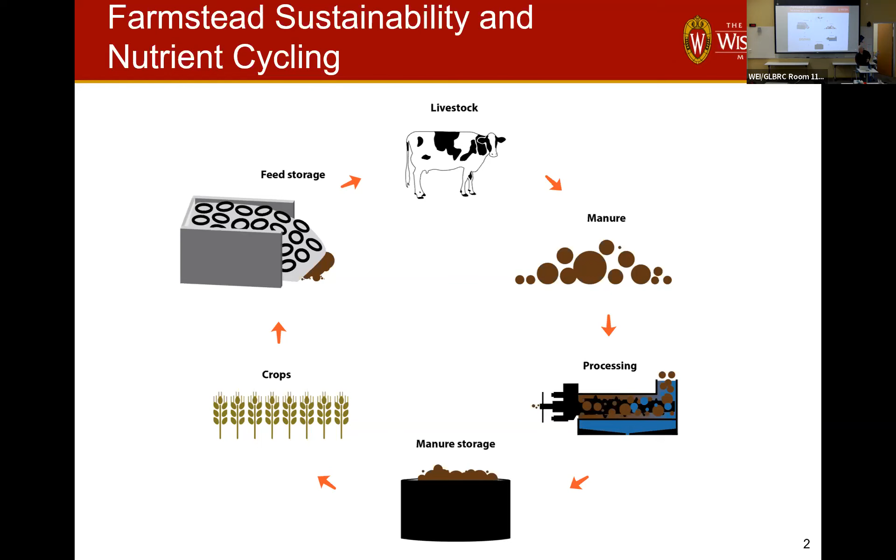Again, livestock systems in particular are going to be a bit of a focus, though I guess I don't have to do that for this energy course. I typically talk to people about digesters in Wisconsin, focused on ag systems. So if you want to talk about the other ones, I'm happy to. But in general, I think of it as a processing system.

I call it processing because, in my engineering training, we would say treatment is trying to end up with some specific outcome. In a treatment system, you're trying to attain an output that meets a certain characteristic. So if I'm going from manure to clean water, I'm trying to hit certain goals for the water through the treatment system. With processing, I'm trying to collect something. I'm not necessarily aiming for where the manure is going to end up, but I'm trying to gather something. So it's a processing system that I integrate into the system.

Livestock systems, do a lot of people have an ag background here? No? One? Okay, that's all right. You eat food, you're not too far from it.

But in a livestock system, manure is produced and then it's land applied. It's similar to human waste, except human waste goes through the wastewater treatment system, where they collect sludge, whether they have a digester or settling tanks, and that goes out to the land, and they treat the rest to clean water. So whatever you're capturing, a lot of it ends up in land application. And so the digester is going to treat, or process, some of that.

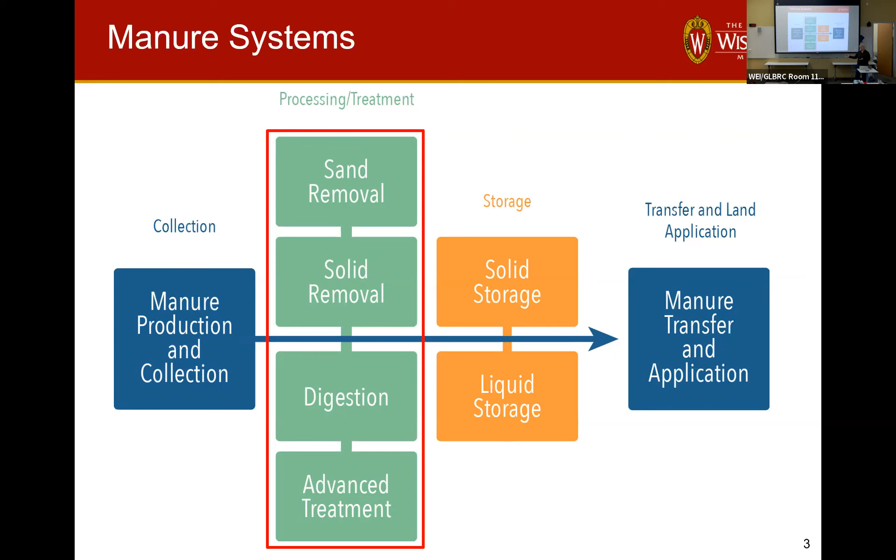The reason I like to highlight the difference is because a lot of people, like a student group that came to me, will say they'll put it in a digester and it'll all be done. But no, you still have manure or waste or whatever you put in. On the opposite side, you've just lost some constituents in the biogas. You still have to handle the product on the other end. It's not magically transformed.

There's a lot of potential for growth in renewable energy capacity. We don't add a whole lot of bioenergy each year. This is globally, and in the US it's even smaller. The percentage of renewable energy in the US, from a different presentation, is something like 12%, depending on your region. And the existing capacity of bioenergy isn't that huge. But there's a lot of potential because it has some flexibilities, and building out a renewable structure with it has benefits compared to some other technologies. So what are our limits to wind and solar?

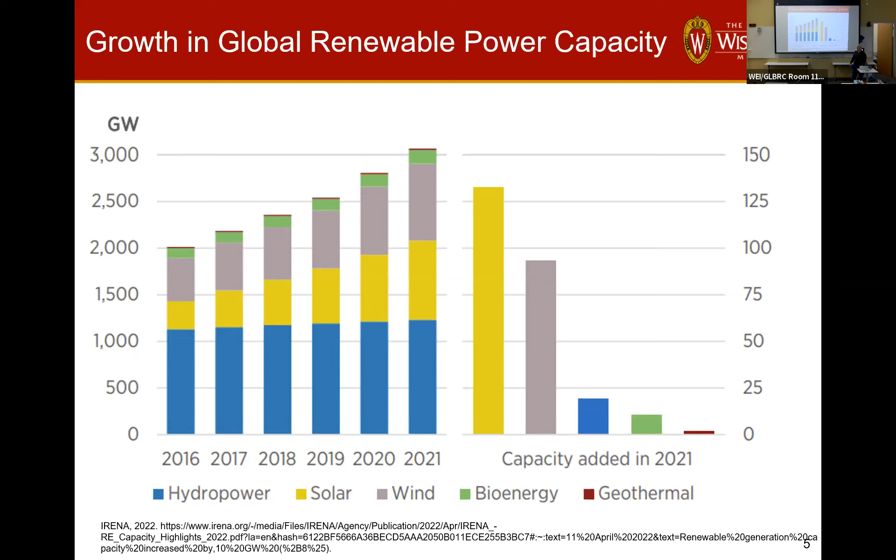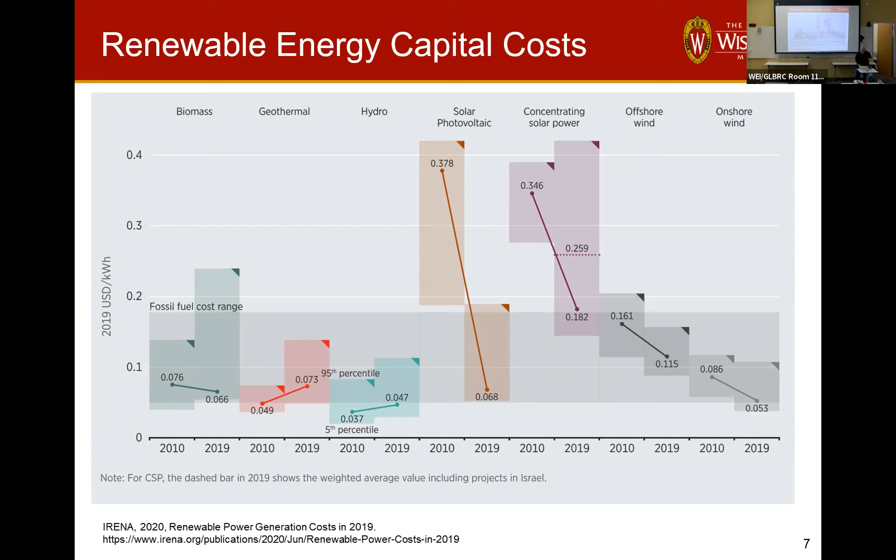And then we see where is biomass. So biomass is over here. It's always not been super high. I would say there's a lot of operational challenges with biomass energy and some other things that make it a little bit difficult. And you can see the range of it is pretty large as well, but not totally outside of the realm of reasonable compared to some typical fossil fuel replacements.

All right, so people get digesters. They're great because you can produce energy, renewable energy, right? You're using a waste product, capturing something else. That seems kind of great. You're making something. People ask me how I got into these kinds of fields. Besides love working with shit, you make something that people think of as terrible into something you can gain a product from. That's kind of a beneficial thing.

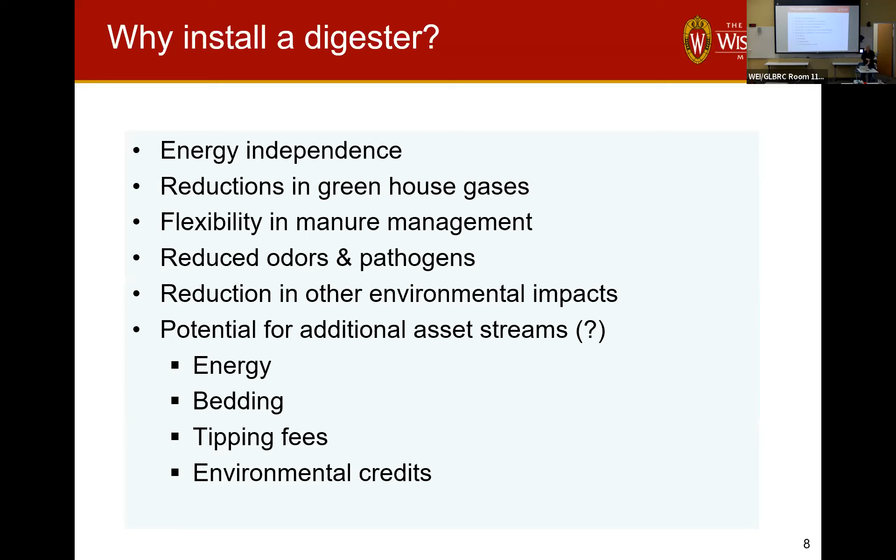It can reduce greenhouse gases. It gives you some flexibility. It reduces odor and pathogens, and it has all of these other benefits that are really great. So what is it, right? So we showed before that picture. So it's a biological process. It breaks down organic matter.

In the areas I work in, they call those feedstocks. I just say that because in different industries, you're looking at different terms for things. I was at a grasslands conference and people got really confused. So the things that go into the digester, I'm going to call feedstocks. You're in anaerobic conditions, so those types of microorganisms can take over, and their byproduct is methane and CO2, right?

So there's some other little things in there. Sometimes people also call this biogas in certain industries. I think in the landfill space, they'll call it biogas more because there's two primary products. I would say typically you're looking at methane in the range of 60 to 65%. Then the rest of that is carbon dioxide. There's some hydrogen sulfide and some other things that cause tons of havoc and are annoying, but they're at really low concentrations compared to what you see here.

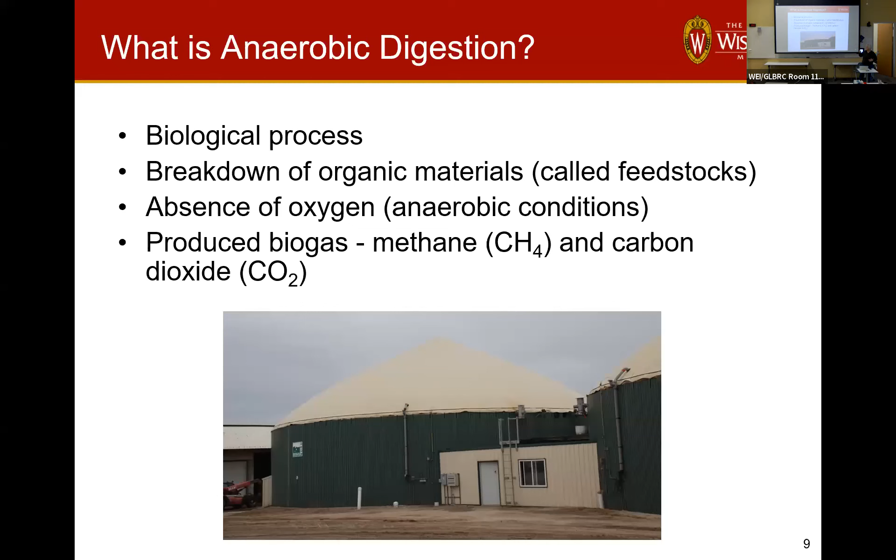In an agricultural setting, you typically aren't going to have a lot of engineers running these in the US. They're operating them, trying to get them to produce biogas just for sale. The other parameters, if you have more pathogen kill, that's great, but I haven't really met a lot of producers who are actively driving at trying to reduce that. So a little bit of a different scheme, even though the process is the same.

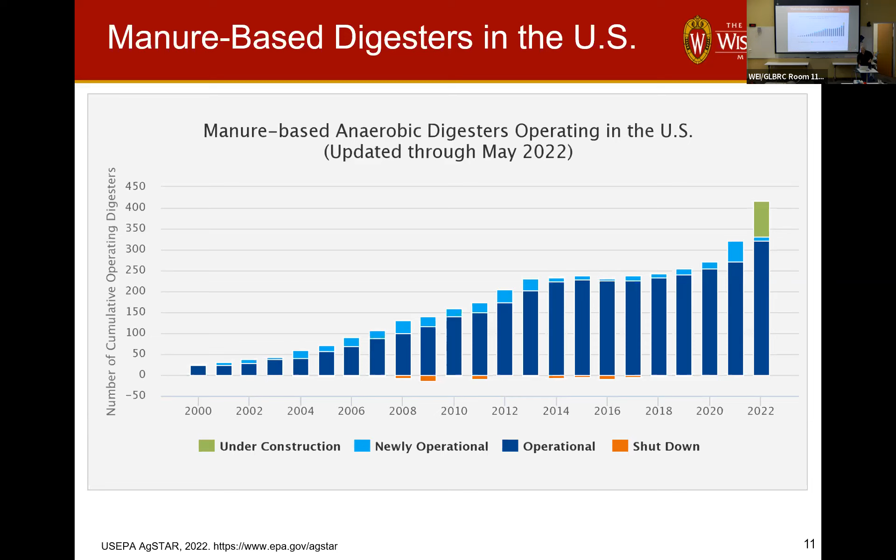So I as an engineer always want to, I'd rather look at some data and build this thing, but policy really is the important part that recognizes how we see change really push through. So if you're interested in policy, make that happen for us.

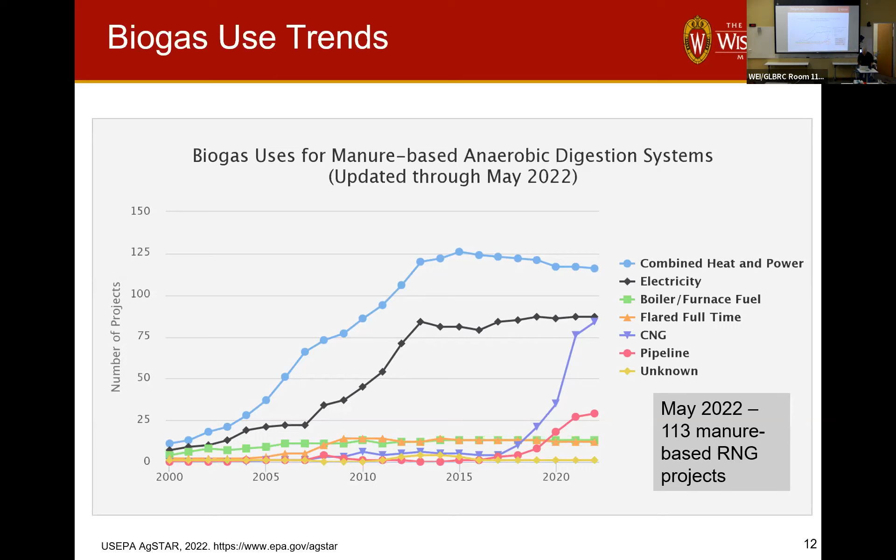The other thing I wanted to note, I was trying to remember what I put this slide in here for. So we had about 289 digesters in the US in about 2020. And so in that recent growth, right, we're almost doubling or 50% above where we were in a very short time, right? So it's all being driven by this conversion and collecting that gas and using it with that policy in a different direction.

Does anybody know how many digesters they have in Germany? So they're much smaller than we are, right? They have like 10 or 13,000 or something, right? So comparably, we are still way lower than the potential in terms of how much livestock could handle, but we haven't seen the growth, right? Because they had a lot of policy incentives where they were able to install a lot of digesters at a time when they made a policy.

They had a feed-in tariff system, and I think that was paying people maybe around 30 cents a kilowatt hour or something, right? So if you can make 30 cents a kilowatt hour, people will invest the money. It's only costing you maybe 10 to make it. There's a lot of profitability there, and then you see an expansion. And how is Germany doing compared to us in terms of their renewable energy portfolio? Right, so it really is driven by some of that. Not that I want to just keep driving this home.

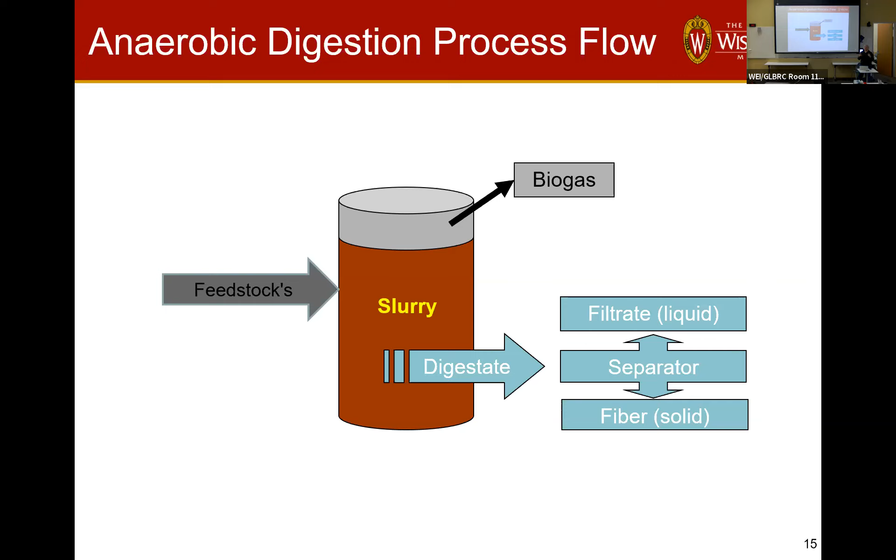So it's different everywhere. Some will come out with contracts where they're negotiating and allowing the investment firm to own a piece of their land. But I would say a lot of producers aren't so into that, but that also depends upon where you're at. So I would say you see a lot of developers, maybe not always owning the systems afterwards.

I was also going to make that point that this is big and I don't need you to know everything, except this graphic is just showing that the cow is what the farm was built to do, right? So they have all these things and, hey, I'm already doing all of that, right? I'm producing, I'm getting feed, I have all these animals, I've got veterinarians, I'm doing all this shit. And then you're adding on all these, right?

So trying to put a digester in, getting to the point of biogas upgrading, and you're trying to decide which hydrogen sulfide removal system you want, right? That's a lot of choices to make. And you usually hire an engineering firm to help you put this together. But then if you're operating it, you have to know all these systems. So it's a lot more to handle.

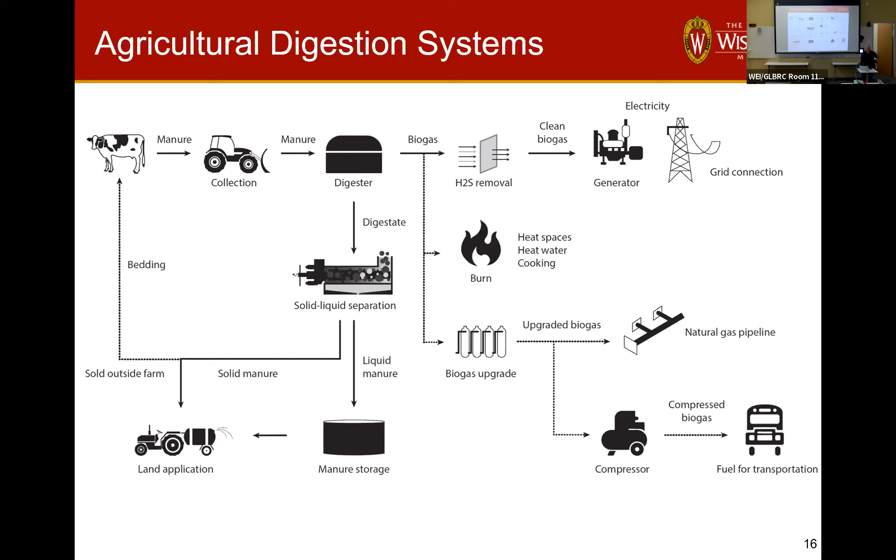When I first started working here, a lot of people were having challenges and it was taking years for them to get the fluctuations of their system under control. And so they were finding, whoa, we need way more labor spread out amongst people. And then I actually saw a lot of the firms using some industrial efficiency techniques and trying to run certain kinds of maintenance, taking on roles that more of an industry side would bring to them. Not that they're not an industry, but on the engineering side, trying to bring in some of those lessons. But it's a lot.

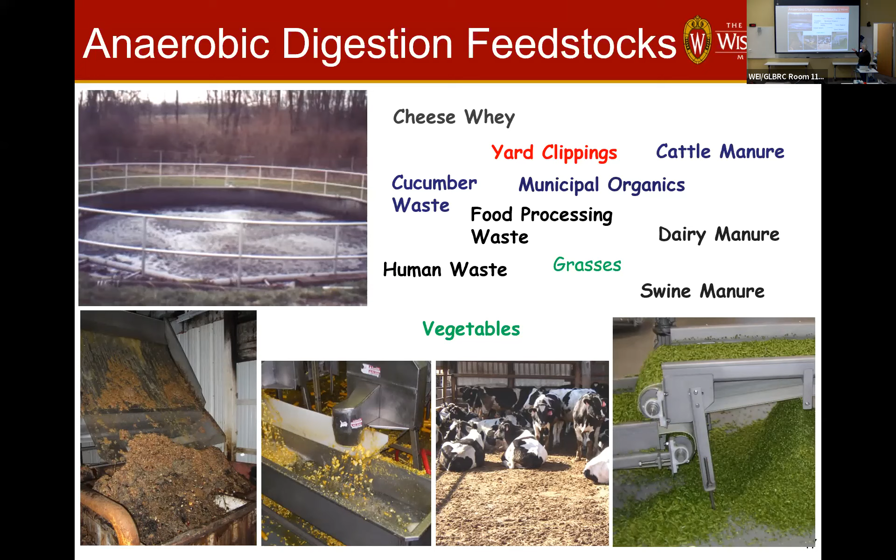So I keep switching gears, but back to the digester, you can put all kinds of things in it. Anything that's organic can go in as feedstock. We don't see as much of this now. We would call this co-digesting. It's really great because you can see this is biogas yield, cubic meters of biogas per ton of the feedstock you put in. And you can see that manure is actually really low. The production of gas from manure isn't really that high.

But you've got all this manure in one spot, right? And so you can feed it into the system, and it's there every day. It's got what we call buffering capacity, so it's really great in that. Otherwise, you might need to add things so the digester didn't get too acidic. But you'll see fats, grasses, other things actually have a lot more capacity to give off more gas. And if you think about it, that's because the animal already used up a lot of that potential, right? So there's a lot of reasons to add other wastes.

One thing I was talking about is policy can do great things, but it also creates shifts that maybe aren't so great, sidebar things you don't expect. So with the policy I'll talk about in a little bit, we had a shift from co-digestion to most farms not co-digesting anymore because of the way they differentiated things. The D3 you get more money for; with D5, if I co-digest, I might land in that space. So to get more money, you don't want to put other things into the manure. And so that policy has led to us not adding some of these waste products into a lot of the digesters, even though they might make our systems more efficient and produce more renewable energy.

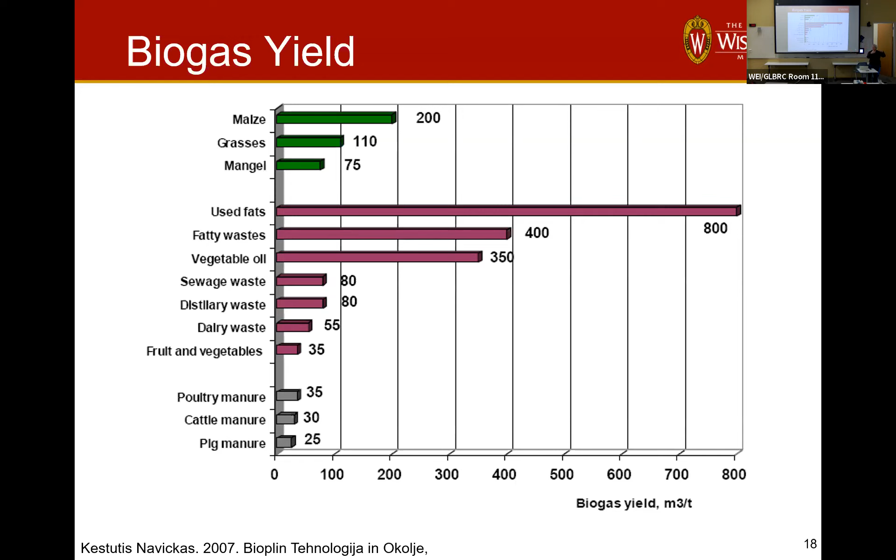And they have some on the LCFS website. They've put some base numbers up there. I just don't know them off the top of my head. Good question though.

All right, so there's a few different types of digesters. The main two that are out there: this is a completely mixed system. Manure or waste comes in, there's a few mixers within there, and then it goes out. It's just a big open tank. And then you'll see the top has that structure.

There's actually a liner inside of there and then another layer, and typically you'll use some kind of air support to be able to drive the pressure in there. So you can maintain the pressure when you don't have a ton of biogas, or you can up the pressure to drive the biogas out. So you can use that a little bit as a control system.

In this system, we call it a plug flow system. A lot of these are now mixed plug flow, you'll see there, because they do have mixers occasionally. But you can think of this as a tube. A lot of times it's in a U shape, but the idea is you put in one end and it comes out the other end. The difference I would say is that this one has a more defined retention time for each thing that you add, right? It has to make it all the way through the digester.

Whereas in a completely mixed system, the way that you draw it, put in and draw out, something could have a retention time. The calculated retention time doesn't take into account all the particles. Now, why is that important? Well, pathogen kill, degradation of the organic material, right?

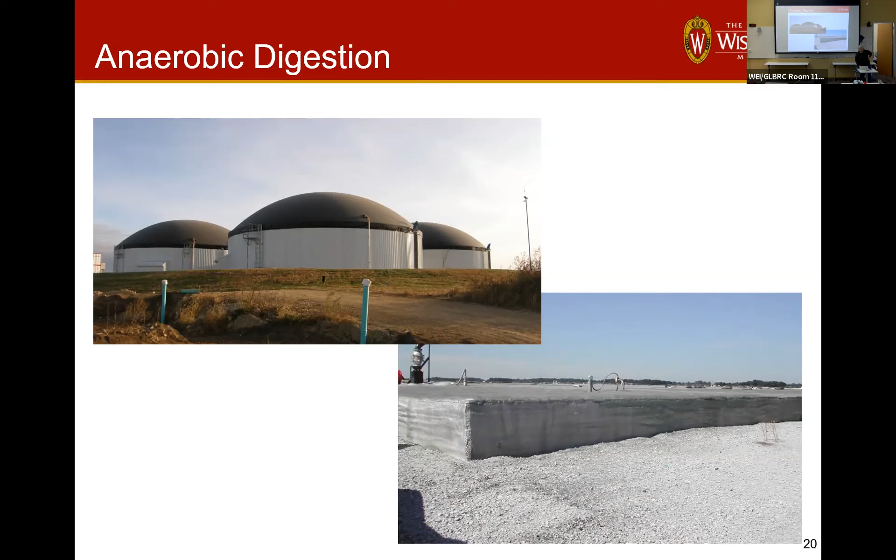If you have a more defined retention time, theoretically that could be better, but they also show that the mixing has greater potential. I would say the data I see from this doesn't suggest one is so much better in terms of biogas production than the other. It's also hard to compare because nobody built two right next to each other that you can test on the same feedstocks. But with the data I've seen, you kind of get a mix of them, and not huge benefits from one to the other.

Dry digestion. This particular one is up in Oshkosh in this picture. In Germany, they have tons of these. There's only a few in North America. I think there used to be two, but I think another one or two might have gone in. But here, it's kind of like a bay, like a garage door or something, right? You open it. And this is not a mixed system.

So you put all the feedstocks in, and then you close the doors, and then 4 weeks later, you open it up and pull them out, right? So it's sitting in there. It does have some systems where it's trying to control the amount of liquid that goes on there. So some will leach down and they'll recycle it and control the temperature. And then you'll usually keep a little bit of that feedstock and mix it in with the new incoming feedstock so that it can have the microorganisms mixed well enough to start your production again. So that's a dry. They use this more for food waste; municipal organics typically go there.

The other kind of digester is like a covered lagoon where I would just have a manure storage and I put a cover. We don't have a lot of these in Wisconsin because we need to heat the systems in Wisconsin because it's fairly cold here, and that's really hard to do in this kind of system. So you see these more like those giant circles of the swine ones down in North Carolina. They're cheaper generally to implement. And then you just capture the gas up there, but they're a little less efficient because you don't have as much control.

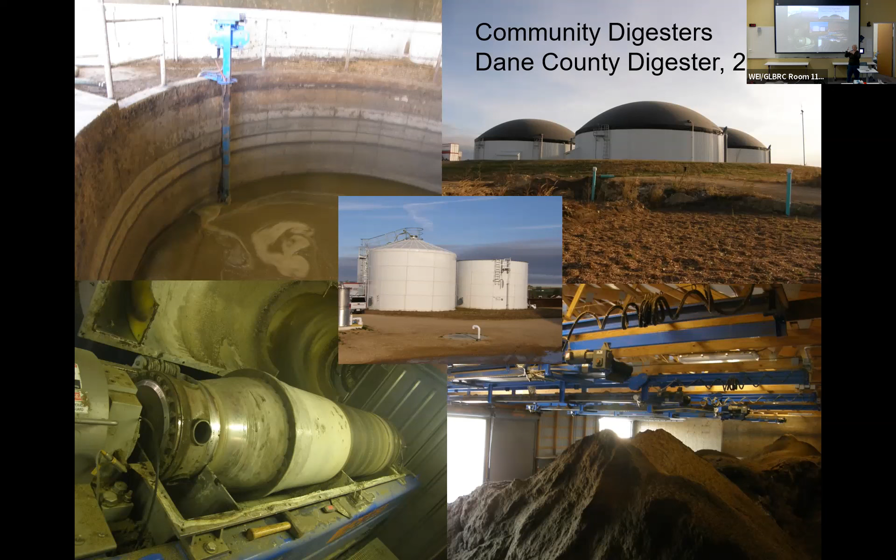I heard of one farm putting a system in where they can take and get biogas from other people. So when we're converting and pressurizing and treating, maybe we don't need to make those processing systems for the biogas everywhere. Maybe we could put the digester at the facility and then just truck or tank that. There's still cost-related issues with that transport.

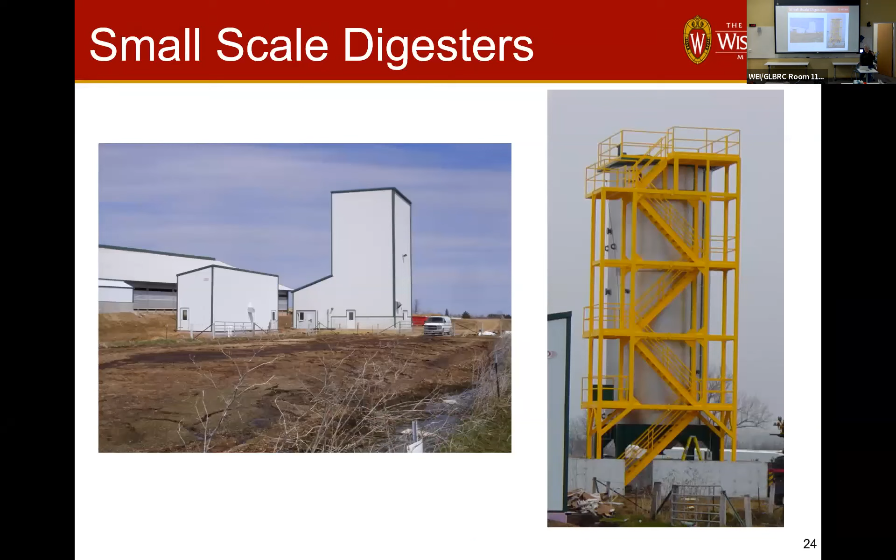There are some small scale digesters; they open and close. This one's still open. It's a little tiny one that they use for research. It runs on a real farm, but UW Oshkosh, Brian Langolf, helps operate this system. I've worked with a few other small scale ones. They go up, they operate, they don't, they do. It's just really hard to keep them financially viable at that scale.

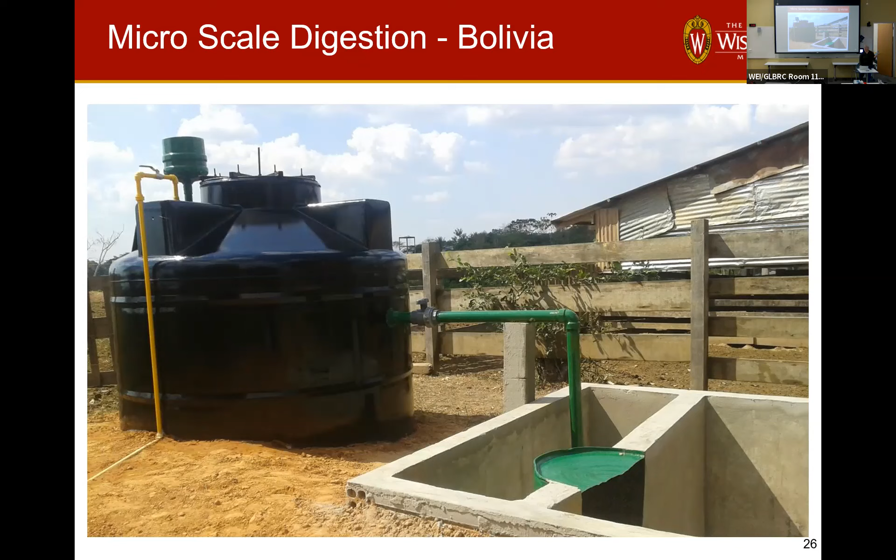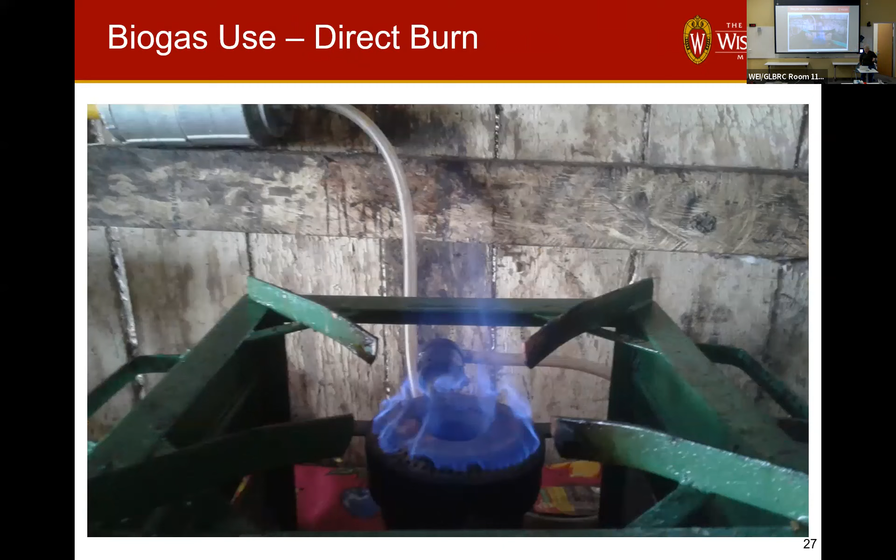You can have micro scale digesters. This is one we built in Bolivia by the rainforest. There's lots of tiny ones; the technology is not, you know, you put shit in a tank, it's not that difficult. You can directly burn biogas. There's only some minor adjustments to be made, particularly from natural gas. We modify a lot of natural gas systems in Uganda where I work. You have to change some orifice things and whatever, but you can get the burning to be pretty easy.

I will say electrical generation, combined heat and power, used to be the thing that everybody was doing. There's some challenges here. Even though I said hydrogen sulfide was a really small part, it does a lot of damage to the actual system. So the gensets have to have this coating lining everything, and the oil changes, all the maintenance, has to be much more frequent.

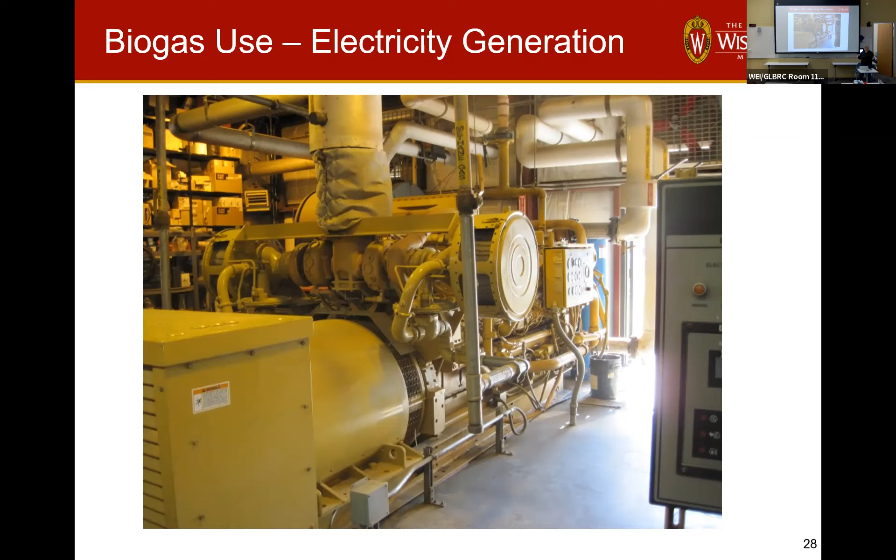I saw someone try to, I can never find this picture, I wish I had it. Someone tried to run biogas through just a little generator that wasn't designed for it, and there was this giant hole in it that the H2S ate. So it's really corrosive, and you have to have specialized systems. That's why the electricity production is more expensive. If you could remove the hydrogen sulfide really cheaply, then use something on the back end, that's a great idea. Removing hydrogen sulfide hasn't been a cheap thing. We're working on things to do that, but it's still taking a while.

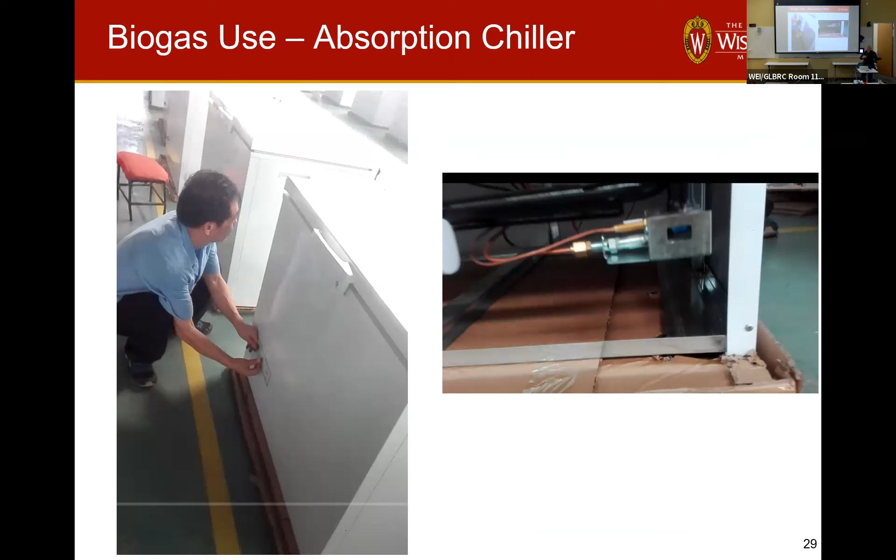These are some old school absorption chillers that we use in Uganda. We modified these so they can run right off the biogas. And so that's kind of cool, because heat in some places is not really what people need, but chilling capacity was really helpful in those areas.

So let me check the time here really quick. All right, we're doing, oh shoot, okay. You want to go through the... All right, I've just got a few slides and then we'll go to just talking and questions.

I just wanted to get to the thing we were talking about that was driving all the installations, right? Pipeline injection and compressed vehicle fuel. There are a few fuel facilities that actually scrub and compress right on site. That's not typically what's happening. You're injecting into the grid, and then somebody theoretically is taking that out; you're assigning RINs or credits to those things that you're injecting. Somebody else is using that for compressed fuel somewhere else.

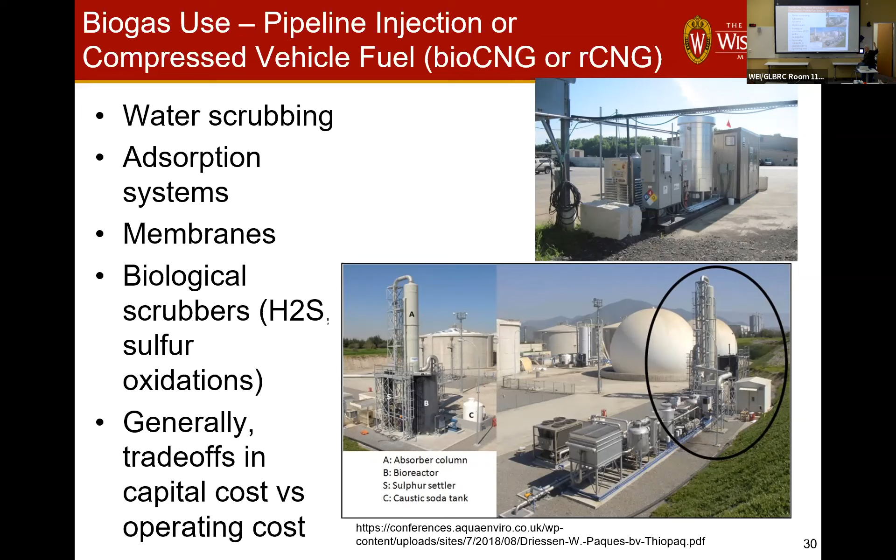There's a lot of tech. You can use water scrubbing, adsorption systems, membranes, all kinds of things. They're generally pretty expensive, millions of dollars of capital costs in these systems, and the operating costs can be quite a bit as well. There's usually trade-offs, right? I pay a little more in the capital, maybe a little less in operating costs. So it depends upon what you're looking for.

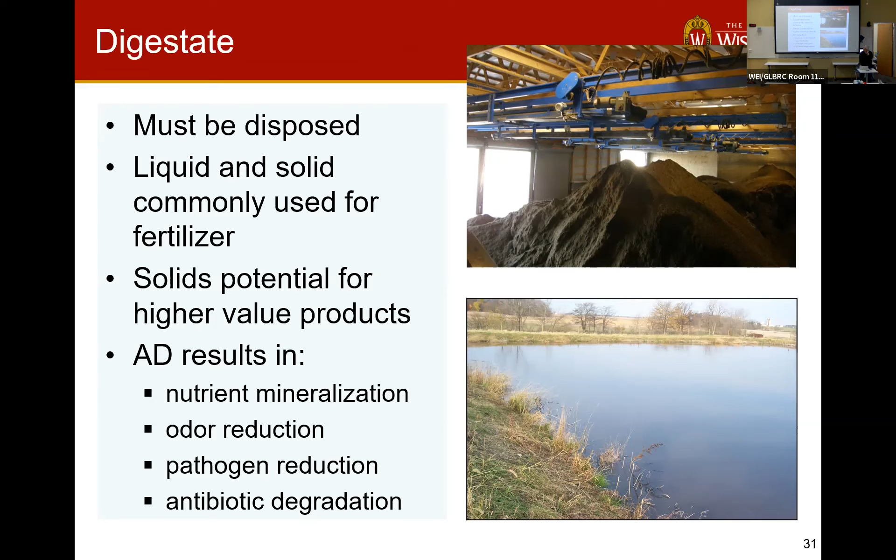What is important, when we did some risk assessments on how you use a manure: if I live next to a farm like this and I'm using groundwater, I'd really love if you're putting digested manure. Your risk is highly reduced. But as a microbiologist I used to work with always said, if you have so much in the influent, a 90% reduction doesn't mean it doesn't have any risk, right? So while it's a lot better than using straight up manure and it's going to increase pathogen kill, it doesn't mean it's perfect and you should put it anywhere. Are there certain pathogens?

We didn't see that. We saw some that didn't die off that are more hardy. They do show that, with changes in pathogens, there could be some resistant strains. We measured a whole suite of them. So we didn't see anything that we saw as resistant, but there could be many that we weren't measuring out there, right? So we were running some ones that are zoonotic, that are common transmission from animals to humans, and then a few specific to animals.

I hate doing odor research, but a lot of other people have, and they show odors reduce. There's one producer who used to tell me they used to send all of their neighbors to the Dells when they applied manure over the weekend, because it was cheaper than dealing with the complaints. But then they got a digester and they were like, nobody even knows when we're spreading anymore. So that kind of shows the difference.

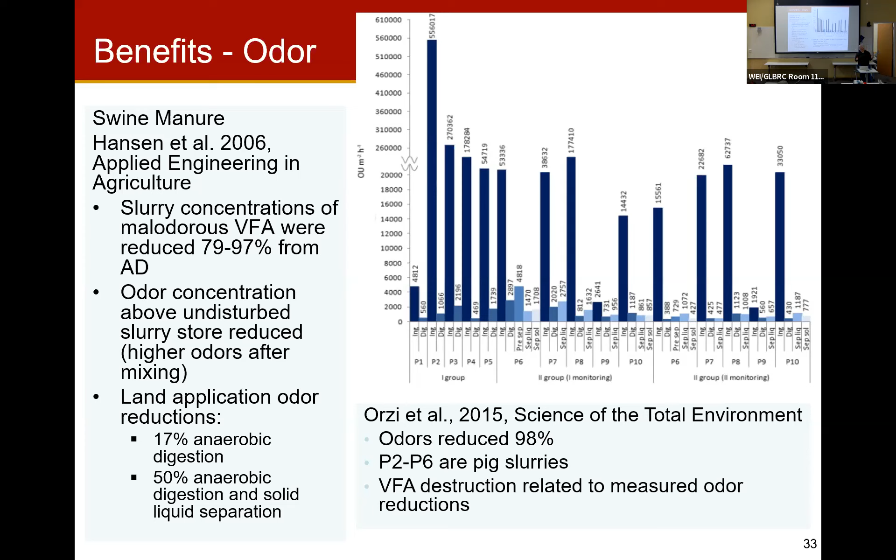A lot of other people say something like, it used to take a rainstorm for the odor to go away. And as an environmentalist, I'm like, okay, what do you think is happening there, right? That's not good. But they were like, no, now it just infiltrates and it doesn't smell at all. There is some antibiotic degradation. Some of the pieces still remain. Antibiotics could reform. Composting has been shown to be better for that, but you do see some of that.

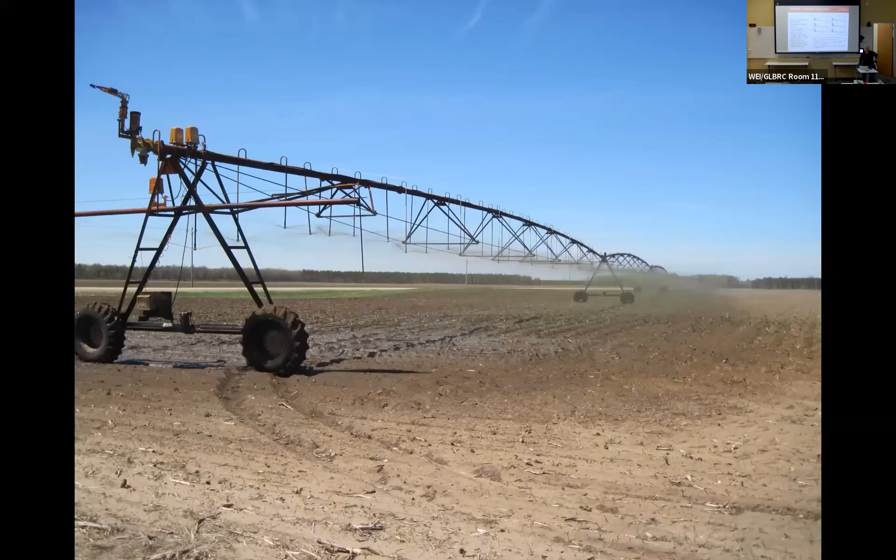All right. The last few things I want to say is there is a big global warming reduction. When we were talking before about why we are seeing credits given to this, well, you're capturing that methane. Methane, on a 100-year horizon, maybe you're giving it a CO2 equivalent of 28 or 30, right? So if I capture that one methane and convert it to CO2, I've just reduced that by 30 times, right? So that's the math that is really changing it.

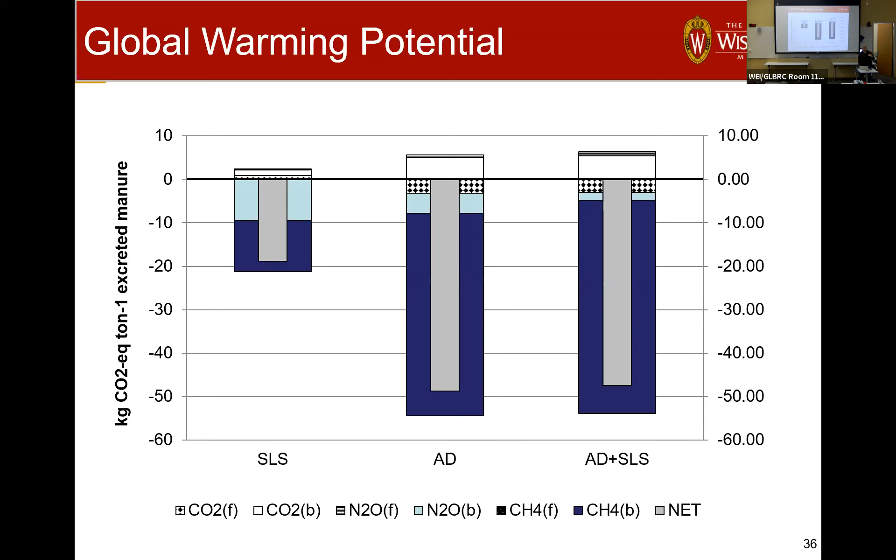Now, we use more technical ways to show what's lost in storage, what's lost when you land apply, and then when you shift to this new system, there's still methane there, right? We've been using some new systems where we used data from existing farms to look at the degradation of solids and the organic degradation, so we could better refine it. And still, the reduction is really great.

But there are some negative things, right? It increases ammonia emissions. This is a big thing happening on those swine farms that I showed you. They have some big issues down there where they're getting really concerned. I had a reporter call me from California: we're putting in all these digesters, are we creating a huge issue with ammonia?

What I try to tell people is it's still a good thing. Environmentally, it's good to introduce these systems, produce renewable energy, and reduce the methane losses. We have additional ways to mitigate the ammonia losses, right? So once I produce the manure, I can inject it, I can do all these other things to reduce ammonia. So I would rather we do the digester and use some additional things to mitigate that unintended consequence.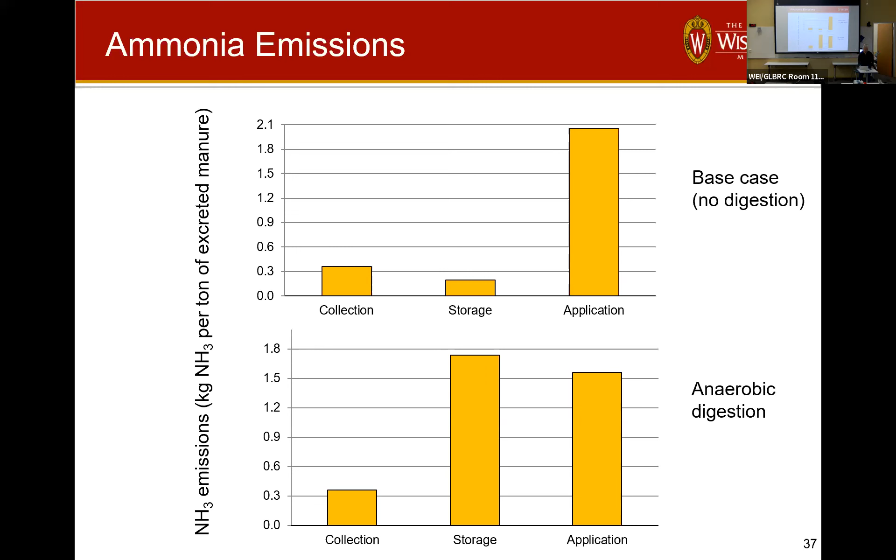The reason this happens is that through the digester, organic nitrogen mineralizes into ammonia, and so you get more losses if you were to treat it exactly the same in storage and afterwards. So it's an issue, but I think it's manageable with other practices. Okay, since we're running out of time, I'm going to skip some of these.

The one thing I want to say is that economics is a really big driver. This was something that someone put together, I think it was Brian Langolf, showing the operation of a digester when they were running it to produce electricity. I think it was 10 cents a kilowatt hour. Their annual operating and maintenance was about 1.2 million, and they made about 1.2 million with that electricity. He was saying they thought they could get it better, bring it down, and make a little bit of money.

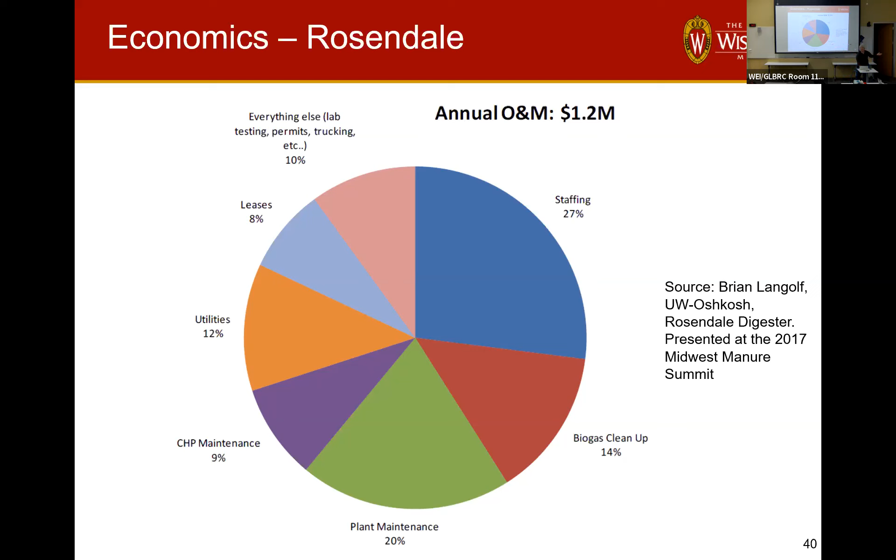And I saw other people paying back their systems in a reasonable amount of time for farms. Not the 2 years that a lot of industry returns want, but farms have a longer term kind of mindset for that. So they were doing all right.

What you can see now is the drive of the installations is from the Renewable Fuel Standard and the Low Carbon Fuel Standard. I don't know if you talked about those in class too much, but you get a RIN number. In the cellulosic category, which digesters fall in, if you just do manure, you can get the D3. And so that's about $3 right now. And if you turn that into BTUs, that's maybe around $40. These were the most recent prices I found out there.

If you end up in the D5, that's about $2, but these fluctuate, right? So for a while, D5 was maybe at $1.50. So they're getting closer, so maybe the difference doesn't matter that much. And the low carbon fuel standard is currently at about 86. When it started out, it was somewhere closer to about 200, but that's per credit. So you kind of have to convert that. And with my estimations, that's maybe around 20 per MMBTU. So you're getting a lot more right now from the renewable fuel standard than the low carbon fuel standard.

It used to be reversed, right? And people were getting more from this other one, if I'm getting all of my numbers correct. But I will tell you, there's a lot of flexibility in this, right? In that low carbon fuel standard, you have to have a process and you get these values. And so depending upon what you input and what your practices are, that number could fluctuate. But what I wanted you to understand is that these are really driving that investment, that this is a much better payback. And for the foreseeable time it will be there, that people think is reliable enough for them to drive this new investment.

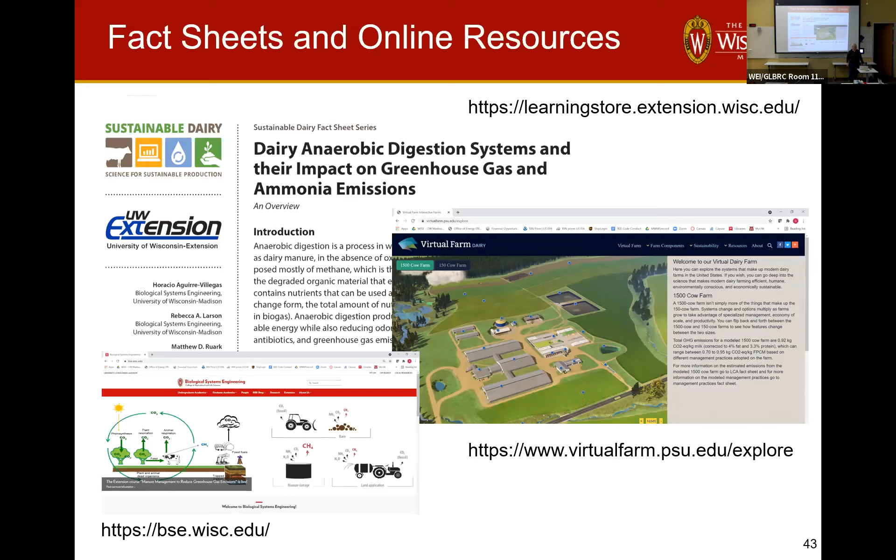There's a lot of tools out there. We have a lot of fact sheets. This virtual farm has, if you want to look at a digester system there, you can kind of go around and take a look at some of those details. And then if we have any time, I'm happy to answer questions in the last few minutes.

All right, I made it through those. Any questions? Is that fuel?

There are two different ones. So generally, the low carbon fuel standard started out of California, and CARB made this kind of rule that they were going to offset a certain amount of things. I think they started out with like 10% or something. And so people who were consuming certain types of fossil fuels were going to pay the money to offset this.

The renewable fuel standard is others who needed to meet the threshold of like, I'm producing fuels and now the EPA is saying I have to offset so much of that production by paying for these other renewable identification number fuels. So that money is coming from people using or producing those other types of fuels that are then required to pay and offset some of that for these other ones. I know it's very generalized. You can say the source of it is the energy bill.

So there was a first RFS that started. The energy bill, that top one. And then the other one was developed out of the state of California, and Oregon has jumped into that. And then I think Washington is moving towards it or is in it. I don't know more in that realm.